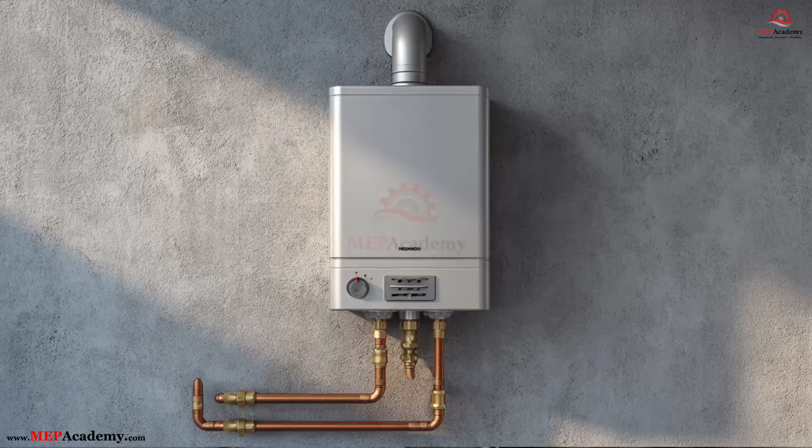Welcome to this step-by-step guide on how to size a tankless water heater the right way. Most sizing mistakes come from guessing. But today, we're going to eliminate all the guesswork by walking through the exact process professionals use, using our Excel sizing calculator as a guide. Let's get started.

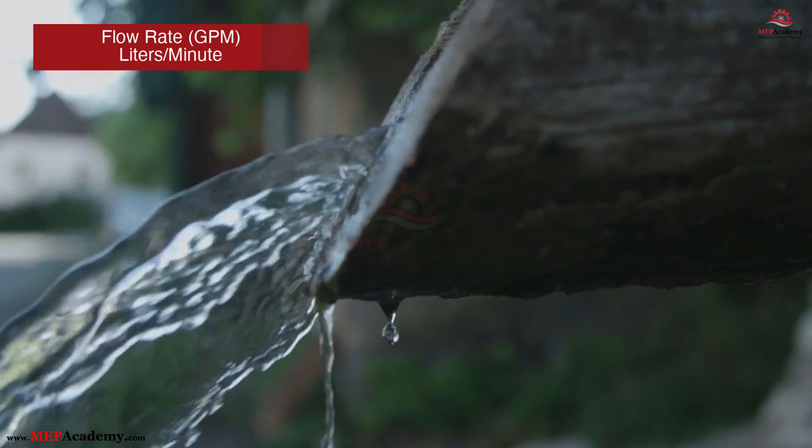Step 1. Understand what really determines tankless size. Tankless water heaters are not sized by storage gallons. Instead, they are sized by how much hot water they can produce at a given temperature rise. There are three things that matter. Flow rate, measured in gallons per minute, or GPM. This is how many gallons of hot water your fixtures demand at the same time.

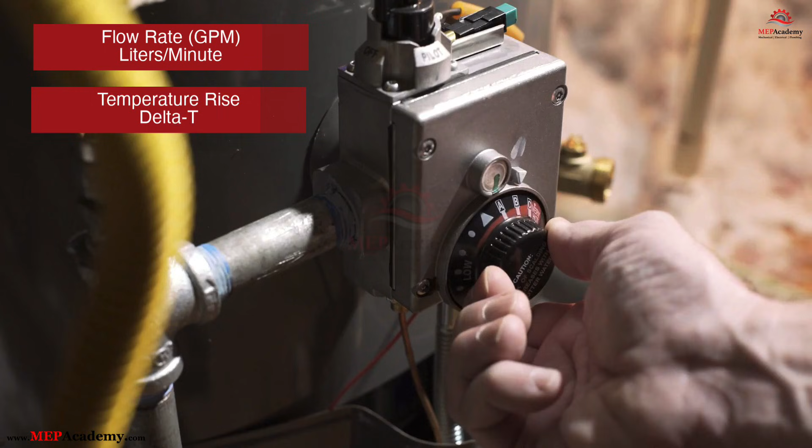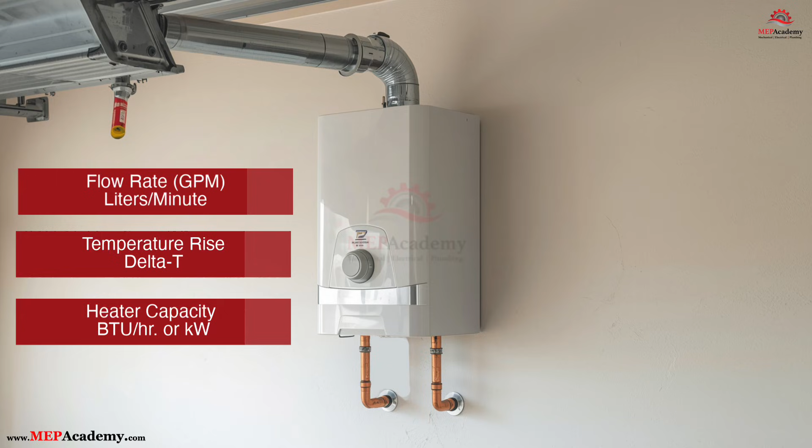Temperature rise, which is how much the heater needs to raise incoming cold water to reach your desired hot water temperature. Heater capacity, measured in BTU per hour for gas units or kilowatts for electric units. To size your unit correctly, you need to determine your required GPM plus your required temperature rise. Then select a tankless model that can meet or exceed both.

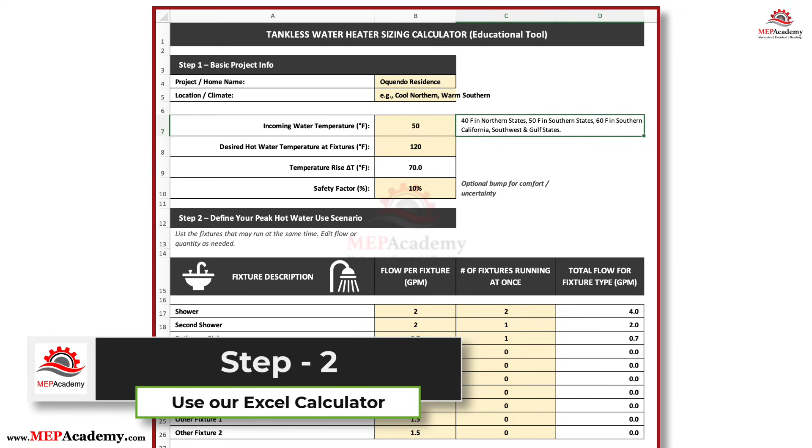Step 2. Start with the Excel calculator. Open the Tankless Water Heater Sizing Calculator. At the top of the sheet, under Step 1 Basic Project Info, enter your project or home name, your climate or location, and most importantly, the incoming cold water temperature and the desired hot water temperature. The calculator will automatically compute your temperature rise, also known as delta T.

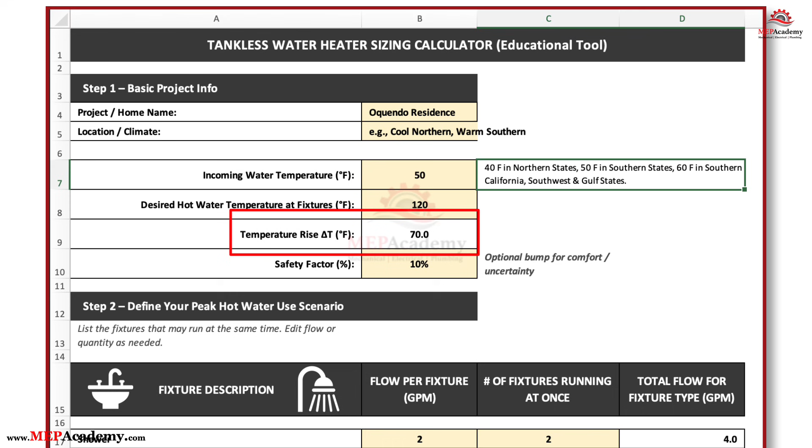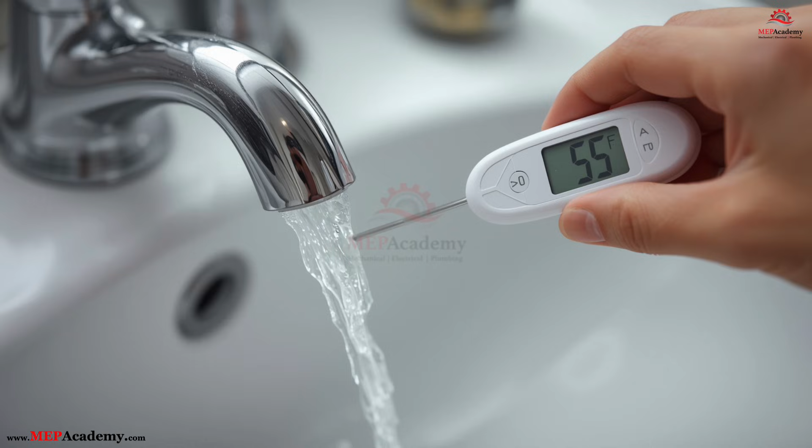Step 3. Measuring your actual inlet water temperature. You'll see many groundwater temperature maps online, but the most accurate method is simply measuring the cold water temperature at your own home. Here's how. Turn on a cold water faucet. Let it run for 2 to 3 minutes, so the water comes directly from the main supply. Place a digital thermometer in the stream or in a collection cup. Record the lowest stable reading.

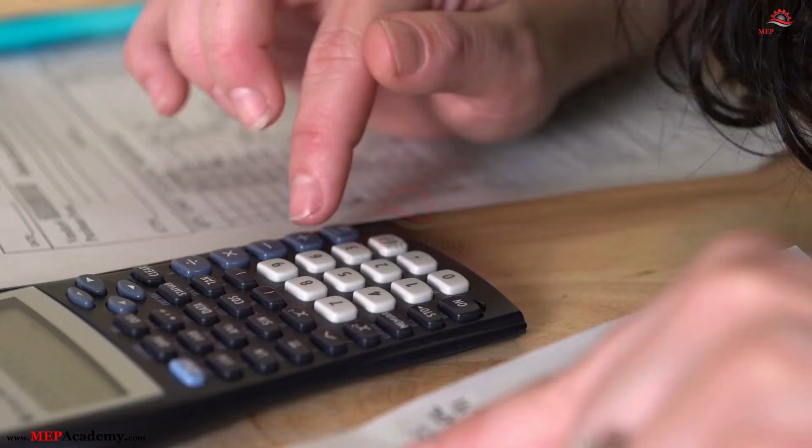This direct measurement is far more accurate than any national map. Enter that value into the calculator as your incoming water temperature. Most people set their desired hot water temperature around 120 degrees Fahrenheit, but you can adjust this based on preference.

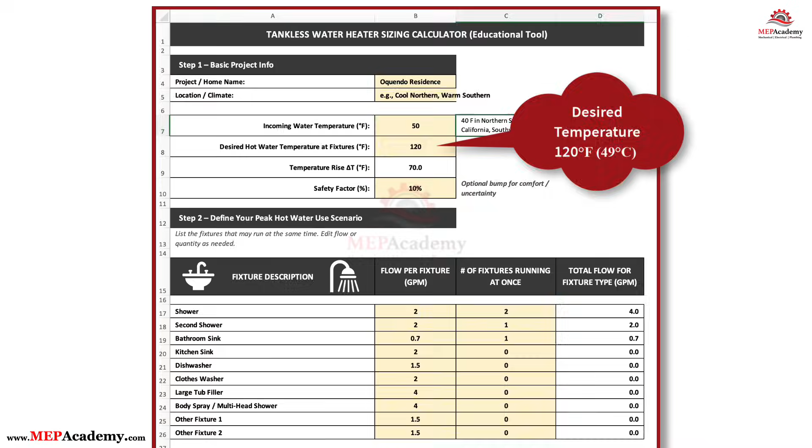Step 4. Build your peak hot water use scenario. Next, scroll down to Step 2 in the calculator, Peak hot water use scenario. This section lists common fixtures like showers, bathroom sinks, kitchen faucets, dishwashers, clothes washers, large tub fillers, multi-head shower systems. Each fixture has a typical GPM value. You can keep the defaults or adjust them if you know the exact flow rate from product specifications.

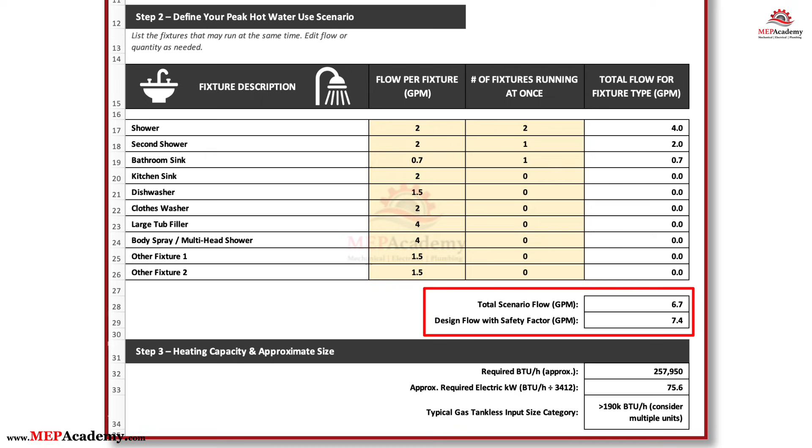Now enter how many of each fixture will realistically be running at the same time during your peak usage moment. For example, 2 showers running, 1 bathroom sink, maybe the dishwasher, or a large shower system. The calculator automatically multiplies the flow rate by the number of fixtures running to compute the total GPM for each fixture type. At the bottom of the table, you'll see the total scenario flow. This is the actual GPM the tankless unit needs to support.

Step 5. Add a safety factor. Above the fixture table, there is an optional safety factor, usually set at 10%. This small buffer helps account for slightly underestimated flow rates, variations in water temperature, users turning fixtures fully open, or minor system losses. The calculator automatically produces your design flow, which is the total flow multiplied by the safety factor.

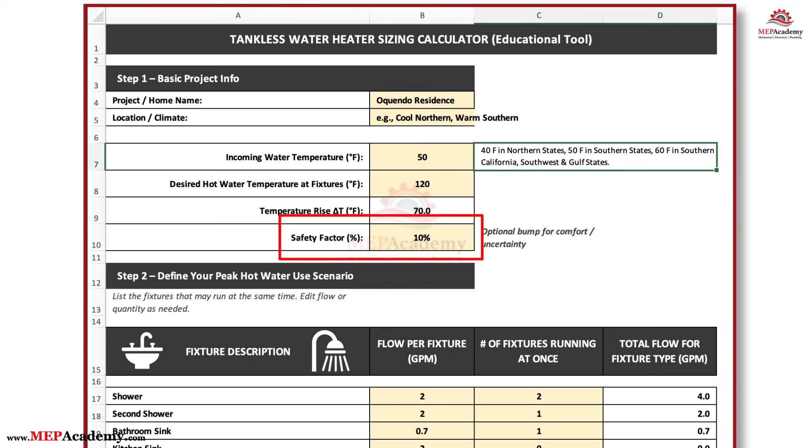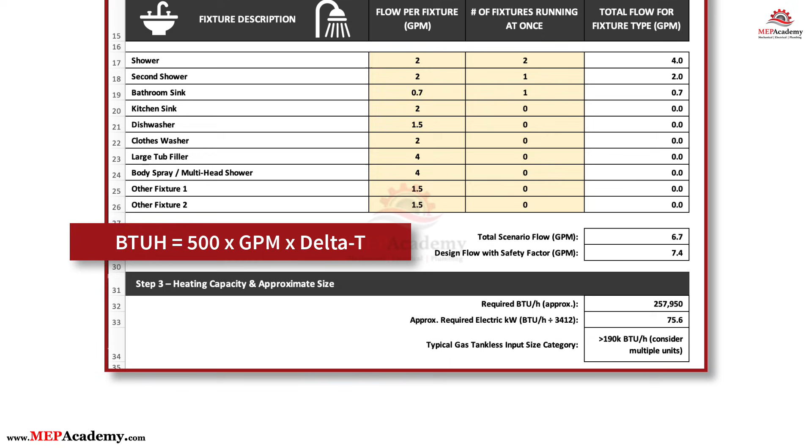Step 6. Calculate the required heating capacity. Scroll down to Step 3, Heating capacity and approximate size. This is where the calculator uses the industry formula: BTU per hour equals 500 times GPM times the temperature rise. See our other video on how this calculation is done. The spreadsheet fills this in automatically. You'll also see the electric kW equivalent if you're considering an electric tankless system.

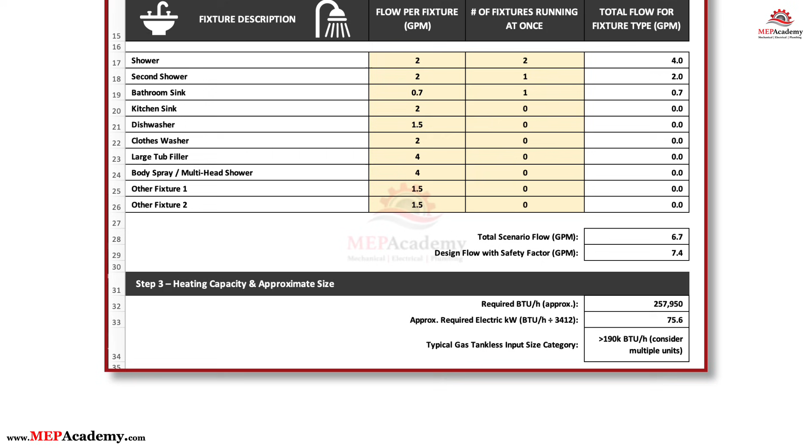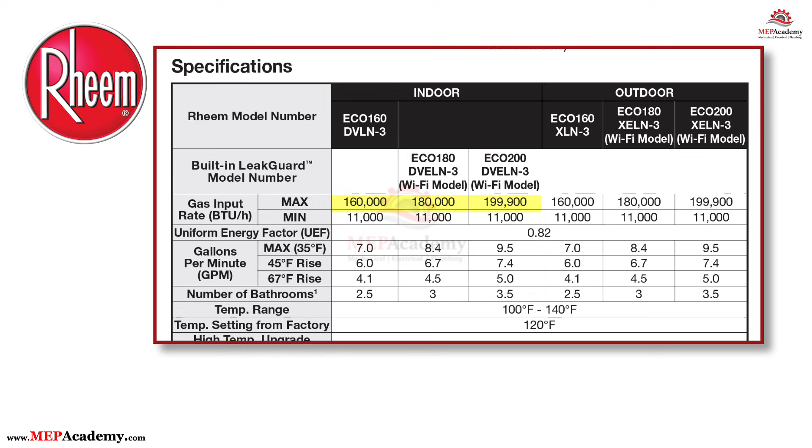Below that, the calculator gives you a rough size category for gas tankless heaters, helping you understand if your project likely requires a 140,000 BTU unit, 160,000 BTU, 180,000, or the larger 199,900 BTU class, often needed in colder climates or homes with higher demand. If the calculated load exceeds typical residential capacity, it may be time to consider multiple tankless units in parallel or point-of-use units.

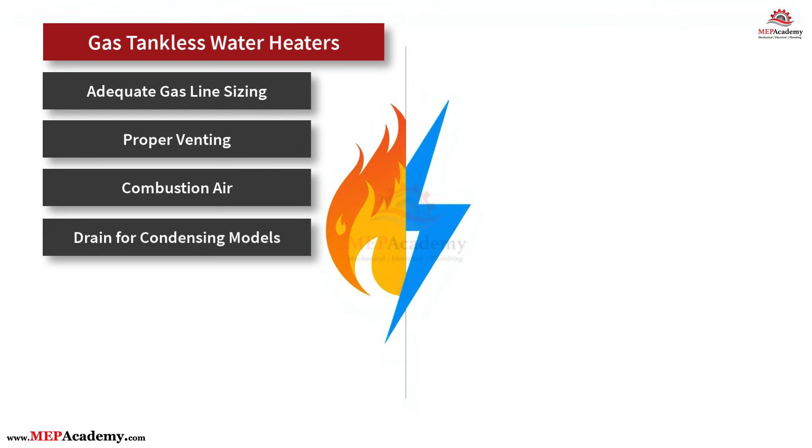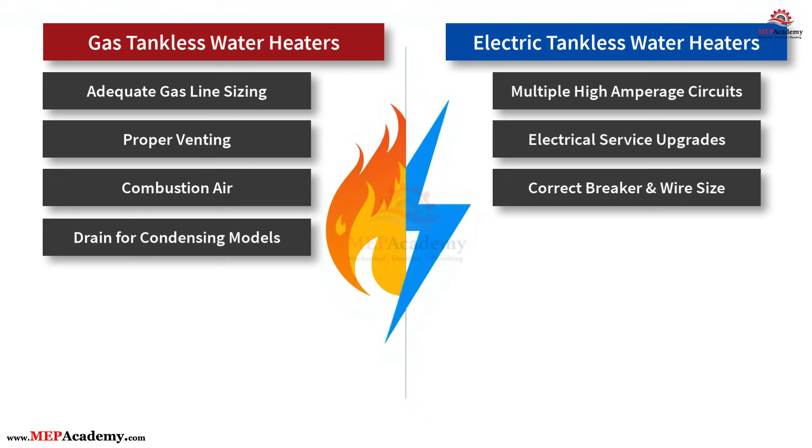Step 7. Confirm infrastructure compatibility. Before selecting a model, make sure your home can support it. Gas tankless units require adequate gas line sizing, proper venting, combustion air, and a condensate drain for condensing models. Electric tankless units may require multiple high amperage circuits, significant electrical service upgrades, correct breaker sizing and wire gauge. This is where a licensed plumber, HVAC contractor, or electrician becomes essential.

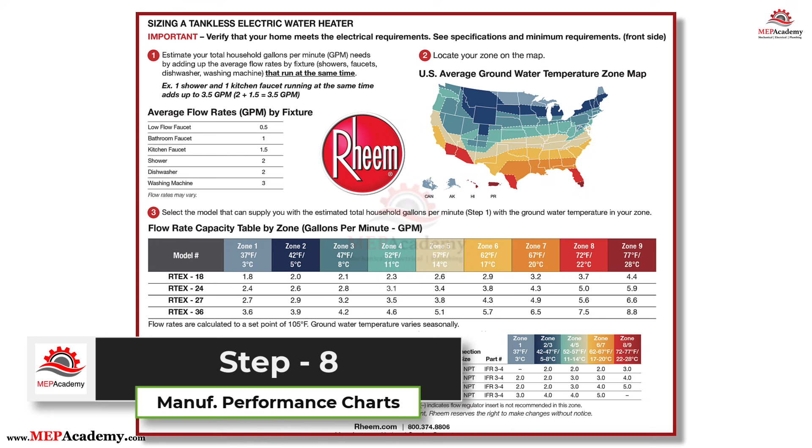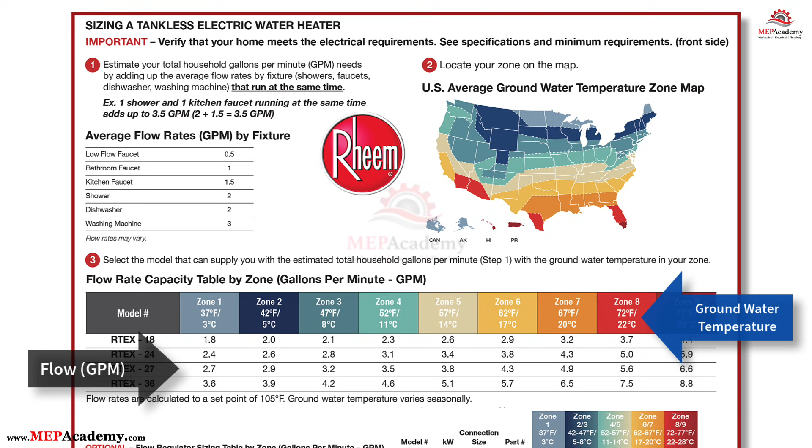Step 8. Match your results to manufacturer performance charts. Once you have your design flow and temperature rise, visit any major manufacturer's website, such as Rinnai or Rheem. Look up their flow versus temperature rise charts. Compare your numbers. For example, if you need 4.8 GPM at a 70-degree temperature rise, make sure the model can deliver at least that much hot water at those conditions. If not, choose a larger unit or upgrade to a multi-unit configuration. Always size based on winter inlet conditions, not summer temperatures.

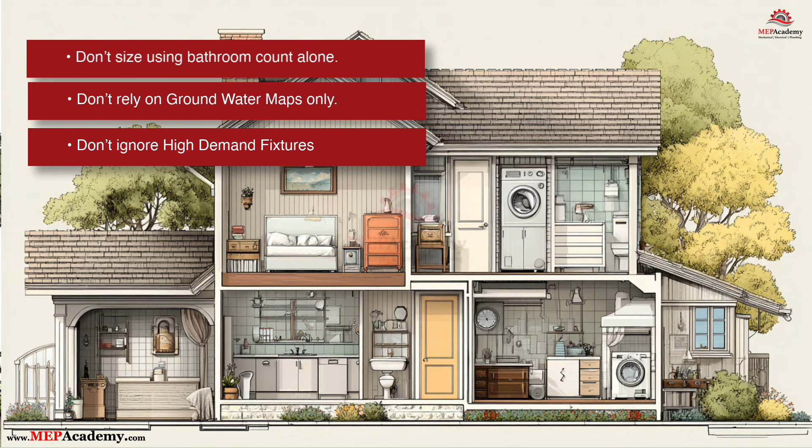Step 9. Final best practices. Here are common mistakes to avoid. Don't size using bathroom count alone. Don't rely solely on regional groundwater maps. Don't ignore high-demand fixtures. Don't overlook your home's gas or electrical limitations. And never assume every 199,000 BTU unit performs the same. Performance varies by model.

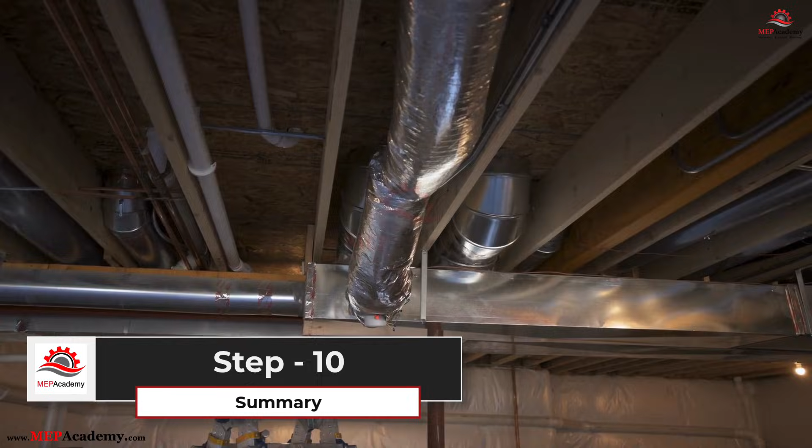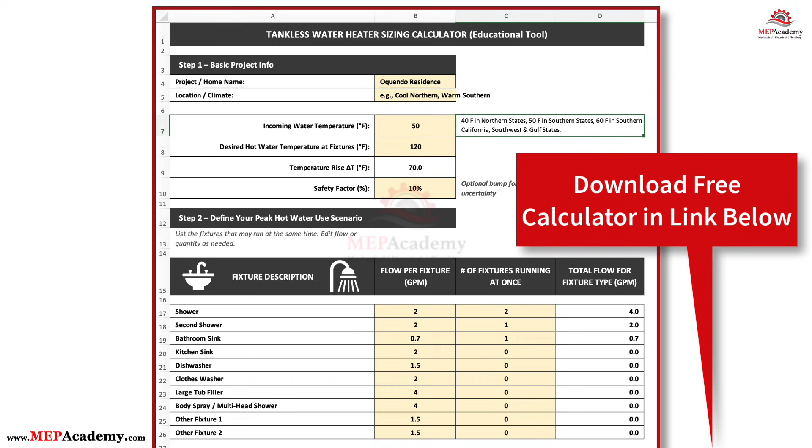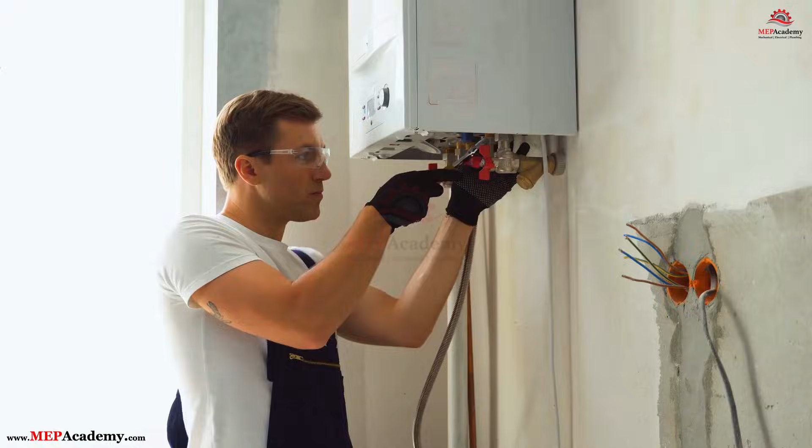Step 10. Summary. Sizing a tankless water heater is simple when you follow a systematic process. Measure the actual cold water inlet temperature. Enter your desired hot water temperature. Build your realistic peak use scenario. Calculate your total GPM. Apply a safety factor. Determine the BTU or kW requirement. Compare results to manufacturer performance charts. Verify your gas, venting, or electrical system can support it. Follow these steps and you'll end up with a tankless water heater that is properly sized, efficient, and capable of meeting your household's hot water needs without frustration.